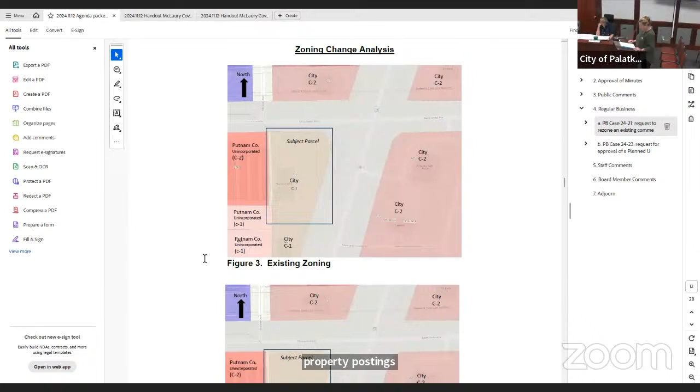The future land use is designated commercial. The parcel is proposed to be developed with a drive-up ATM kiosk for Bank of America. Per section 94-149(7), banks and financial institutions with drive-in facilities are permitted in the C2 zoning district, but not in C1. Public notice was issued by the city, including legal advertisements in the Palatka Daily News, property postings, and mailed notices to property owners within 100 feet of the subject property. The request meets all the standards for rezoning set forth in the code, and therefore staff recommends approval.

The applicant is present if there are any questions. Okay, thank you. Walton, you want to speak? Questions? Has anybody got any questions of Mr. Palacier, Ms. Garris? Okay, seeing none, move on through that.

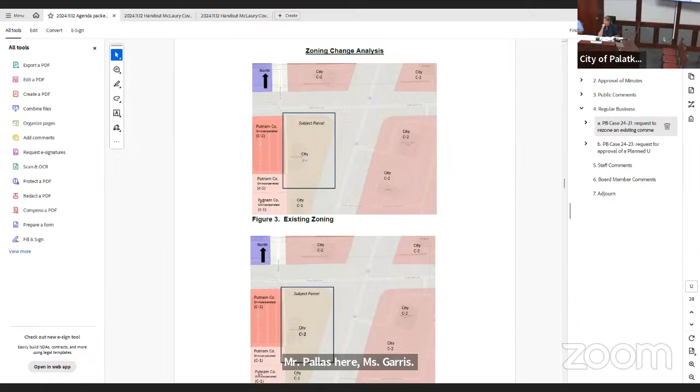Anybody in the public want to speak to this, for or against? Seeing none, we'll move through that. Bring it back to the board. Is there any questions or discussion the board wants to have, or do I hear a motion?

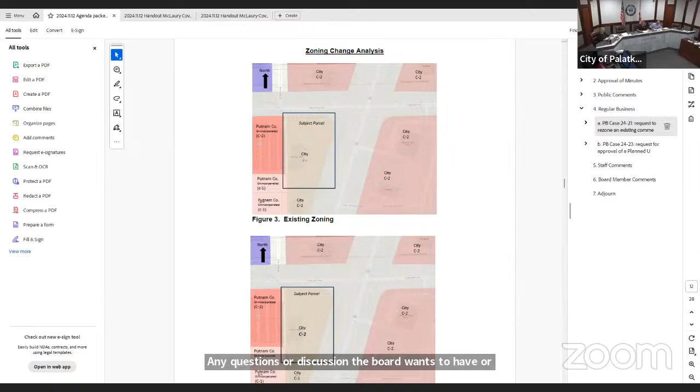I'll make a motion that we uphold the staff recommendation to rezone from City of Palatka General Commercial C1 to City of Palatka Intensive Commercial C2. Okay, we have a motion. Do we have a second? I'll second. Any discussion? Seeing none. All those in favor say aye. Aye. All those opposed? Seeing none, motion passes.

Granted. Now we'll move on to PB case 24-23. Request for approval of a planned unit development application at 00 McLaury Drive and 6200 St. John's Avenue. You gonna throw that one at us?

Yeah, okay, thank you. Before I start with the staff report, I need to get clarification here in the package that you have. Since the report was written, the applicant has submitted materials addressing some of the issues that I had pointed out in the report. We have a copy of the things that were submitted to us that the clerk has, and these later submissions by the applicant address some of the concerns and conditions that I had. So when it comes to the recommendation for approval, I will release some of the conditions in your staff report.

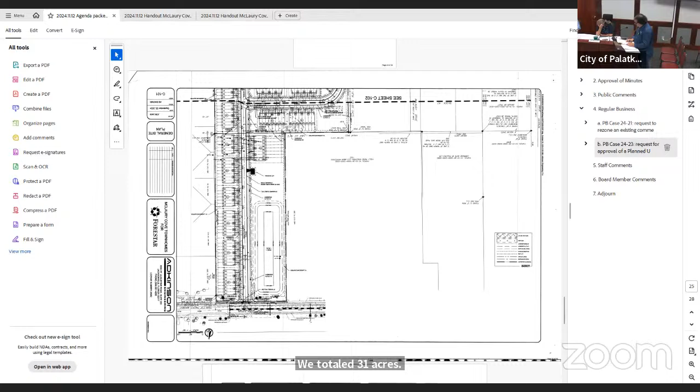As you pointed out, Mr. Chair, this is an application for a planned unit development. There are two combined parcels totaling 31 acres. One parcel fronts St. John's Avenue and is 6.67 acres, and the other parcel fronts McLaury Drive at 24.33 acres. If you remember, this item was in front of you for annexation, for a future land use amendment, and for rezoning about a couple months ago. Since then, it went to the city commission, which recently approved the request for annexation, future land use, and rezoning.

The parcel is now rezoned to Residential 3 with an overlay planned unit development. The applicant intends to develop these parcels as a planned unit development with up to 248 townhome dwelling units, which yields a maximum density of 8 units per acre.

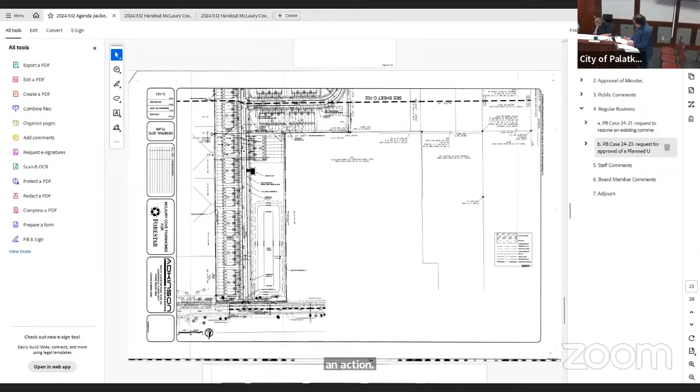We have reviewed the PUD again against the standard set forth in the code, that is Section 94-233. Based on our review of each of these standards, which is cited in the staff report, we are recommending that the request be approved, and that you recommend this to the city commission for consideration and action. In the staff recommendation, I had attached certain conditions of approval, but since then they have resolved those issues.

The first one is the site plan submitted. The first condition was that the site plan submitted should include provision for open space. The applicant has since submitted an open space plan that satisfies the requirement for the PUD standard.

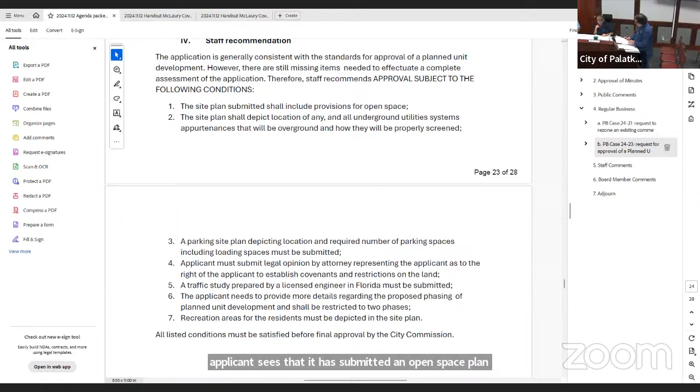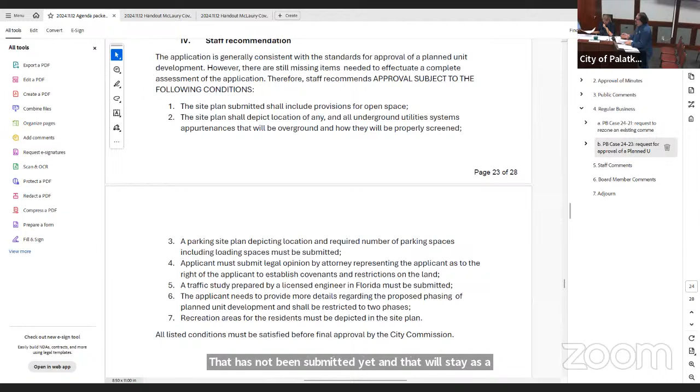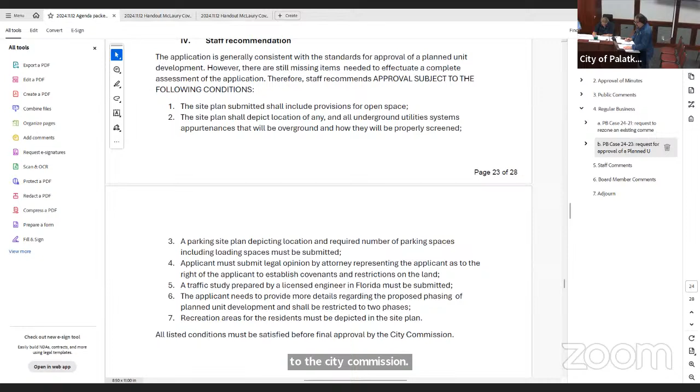The second item: the site plan requires depicting the location of any and all underground utility systems and appurtenances that are above ground, showing how they're going to be screened. That has not been submitted yet, and that will stay as a condition that has to be satisfied before it goes to the city commission. There's a requirement in the PUD standard that all utilities be underground, but there are some appurtenances above ground that are required to be screened, and the site plan submitted hasn't shown that yet, so that has to be satisfied before it goes to the city commission.

Condition number 3: the requirement for a parking site plan depicting the location, required number of parking spaces, and loading spaces. That has been satisfied. They have submitted a site plan indicating the number of parking spaces and their location. So that's been satisfied, along with condition 1.

Number 4: the condition was that the applicant must submit a legal opinion by the attorney representing the applicant as to the right of the applicant to establish covenants and restrictions on the land. That has not been submitted yet, so that condition will stay.

Condition number 5: a traffic study was submitted, prepared by a licensed engineer in Florida as required. So that condition has been satisfied.

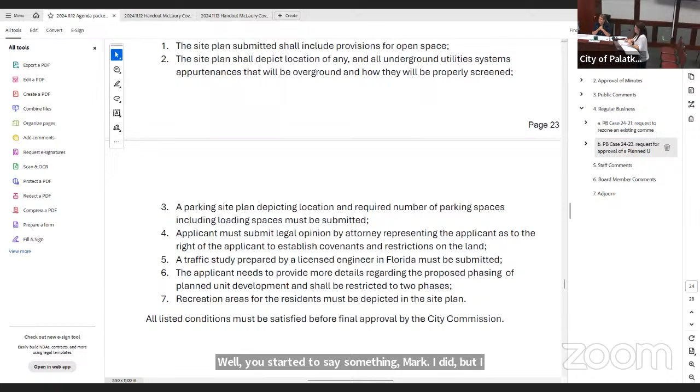Any further questions? Yes, sir, Mr. Kim. No, I'm good. Well, you started to say something. I did, but I changed my mind. Okay, well, I can do that. Yes, you can, very quickly. He's 80 now, he can do it. So, okay, well, no further questions of you, I don't think. Thank you very much. Thank you.

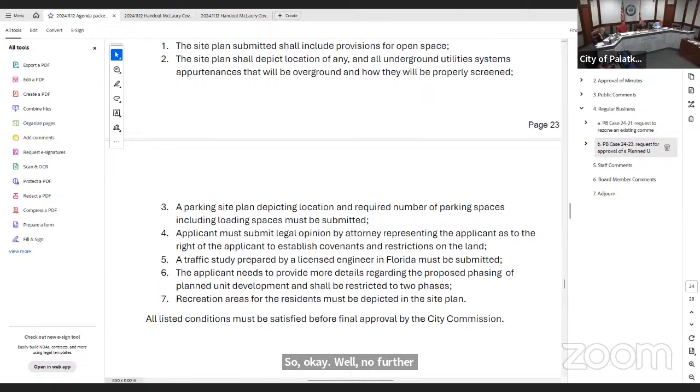Is there anybody in the public that would like to speak for or against this? Come and state your name and your address, please, sir. Gary Nielsen, 6104...

6110 Fourth Manor West. I believe the new development is going to back up somewhere close to my property. I talked to Lorenzo a few months ago about this, and we weren't really sure what was going on then. Then I got the letter in the mail about today.

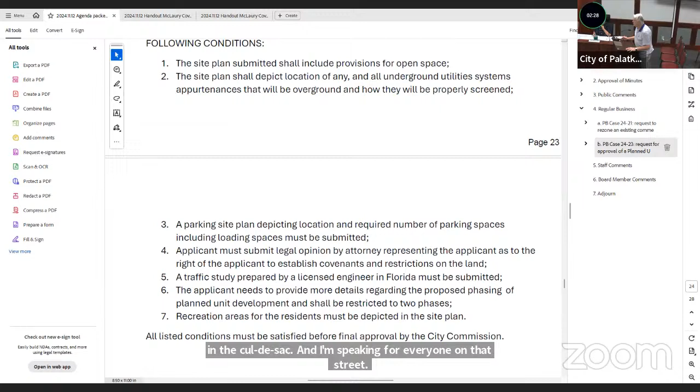I'm speaking for everyone in my cul-de-sac, on that street. A few of them couldn't come today, so I went ahead and came for them, to speak for them. A couple of questions have been answered already about what type of housing it's going to be. It's not low income housing, am I right? It's going to be houses, not apartments or townhomes.

Okay, townhomes, but it's not low income. You said 248? About where is this going to come in at? I can show you on a map about where I live.

Hang on just a minute, Gary, I'm gonna get to that question. You need to speak to us. Oh, I'm sorry, okay. I just want to know where it's coming in and how far it's going to be from our property. Ms. Krantz, is there any way you can pull that up on the TV, please? On the screen?

Mr. Chair, can I address part of what he's questioning? Yes, sir. The main access for this development is going to be from St. John's. Right, I know that. And I think they're going to use McLaury. At St. John's, how far down? It's in between Viking Manor and the cutoff to the hospital, somewhere in there. Isn't it gonna be between Carriage Gates and Holly Ridge? Yes. And then where is it coming in at?

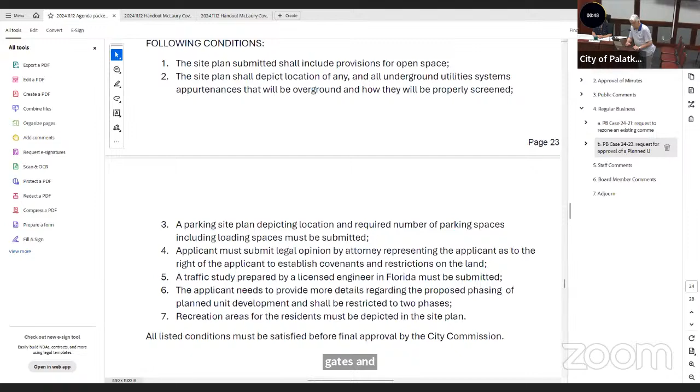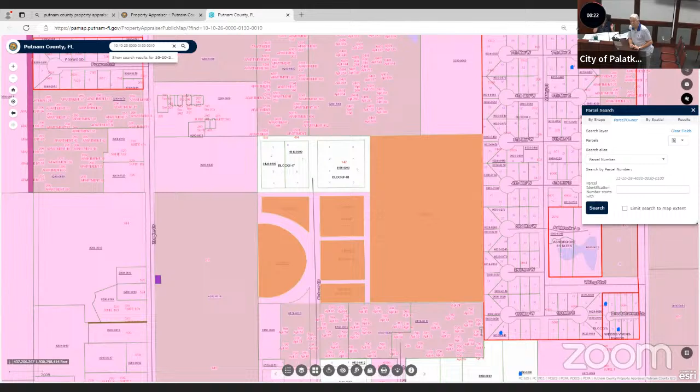Do you have the site plan? Oh, in the package, wherever it shows the site plan. May I stop his timer, Mr. Chair? It's fixing to go off. Yes, sorry, just so we don't hear that. The parcel map that you had up there will show us your answer to his question, yeah, the location.

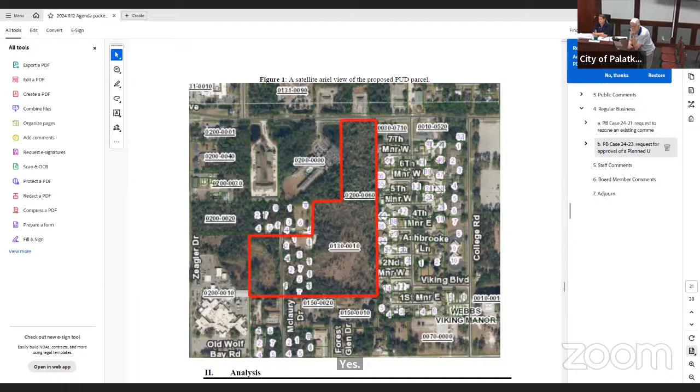Yeah, the pink part there, drag it down some. Can you show them? See that, St. John's Avenue. There you go, can you enlarge that a bit? Can you expand a little bit? That's good. So this is going, Mr. Nielsen, to answer your question, it's gonna come right up to the back of where you live at. Okay, I'm on Fourth Manor, right west.

Well, no, Second Manor West, Third Manor and Viking Boulevard. Yeah, it's gonna be right there. Okay, I know that's a big area there. There's a lot of golf balls out there too that I see. I'll let you know ahead of time. There is, yeah, always about 1,000.

But how far will, I guess the houses will be facing St. John's Avenue, right, and the back of them would be, no? No, okay, they're gonna be facing west. Oh, they'll be facing west, okay. So coming in this way, yeah. No, that way, I'm sorry. It's west. I can show you the site plan after the item.

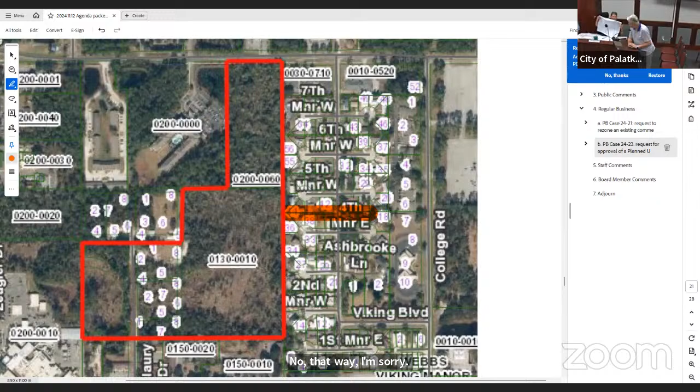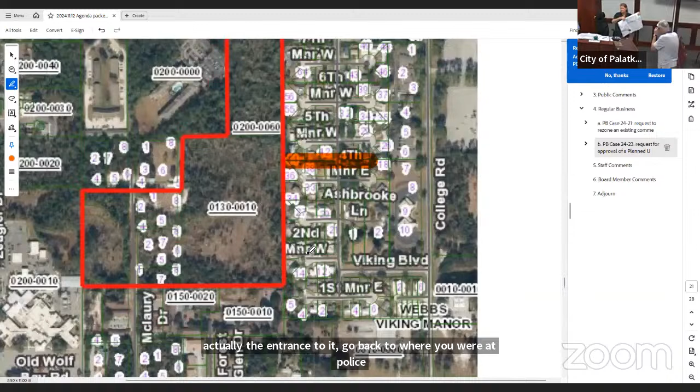Yeah, exactly. And actually, the entrance to it, go back to where you were at please. The entrance will be between Holly Ridge and the doctor's offices. I said between Carriage Gates and Holly Ridge. Am I right? If I can help a little, it's probably about 150 feet from the property boundary inward. So from the property boundary right here to the access is about 150 feet.

Okay, so you're saying that the townhomes will be 150 feet away from where he's worried about? No, sir, I'm talking about the ingress egress. Oh, okay, I'm sorry. What are the setbacks, say from his property line? Yeah, that's on the setback.

There's a lot of places going toward north, I guess it is, to Third and Second, Fourth Manor, there's no fence. Would I have a fence in the back of my house? That's what I was gonna ask. I'm sorry, it will be 40 feet from the property line to the unit, to the building, of the townhouse. Okay.

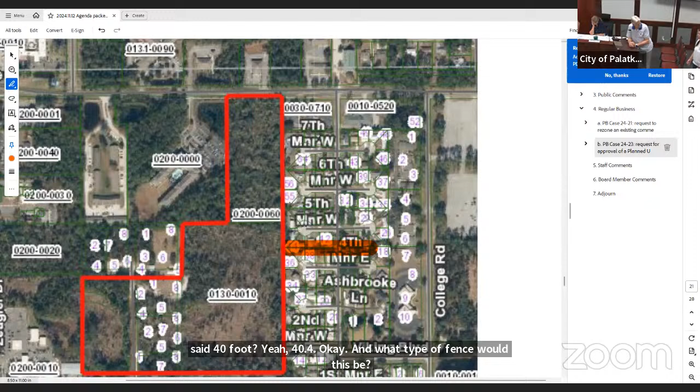That answer your question any at all, or are you still waiting or what? Yeah, well, the fence, are you guys going to put up any type of, okay, it's gonna be, you said 40 foot? Yeah, 40. Okay, and what type of fence would this be? Usually vinyl.

Okay, all right, we still have to review this, Mr. Chair. I know this is, we still have to review this when it goes for building permit. Right, and that's where we're gonna get really into the real details of setbacks and things like that, of that nature. Okay, so we'll know more in December, right? You're gonna have, your next meeting's gonna be in December? Or for the city commission, and then, yes, after that, and after that they have to go for the building permit.

Right, and exactly, that's where we're gonna get into the nitty gritty of the detail. And I'll receive something in the mail, like I have been. Okay, yeah, that's all I can ask. Okay, just, we'll kinda keep you posted. Appreciate it. Thank you, Mr. Newsom, thank you so much.

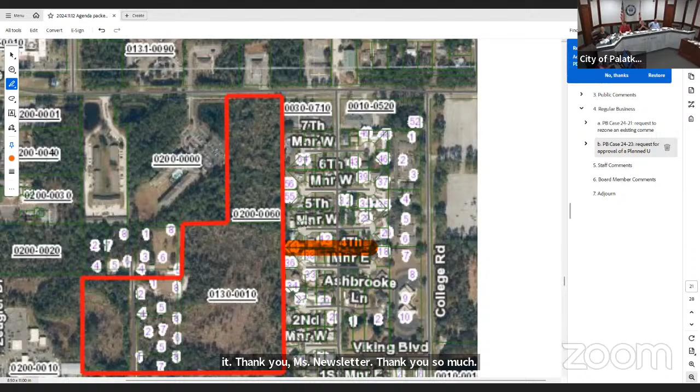Anybody else in the public? Yes, Ms. Allegra? Allegra Kitchens, 1027 South 12th Street, Palatka, Florida. I'm not either for or against the PUD, but I have a question.

I know from an emergency vehicle standpoint, you have to have more than one egress and ingress. You can't have the same way in and way out, just one way in and one way out. You have to have two different ways in and out for emergency vehicles. And I wonder if that's been taken into consideration. I know they talk about McLaury, which they said is a dirt road at a certain point. Is that adequate for emergency vehicles as a second way in and out? That's my only question, thank you.

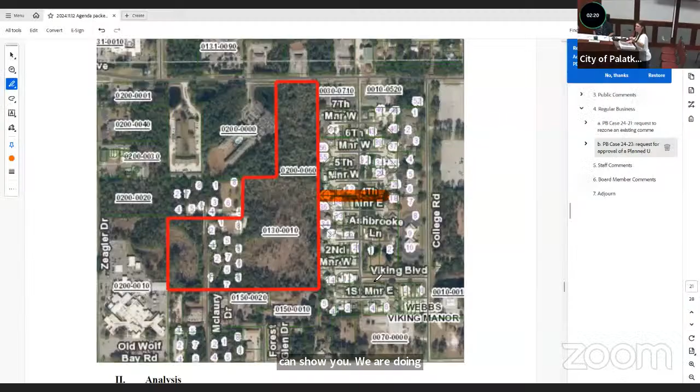Want to answer that please, ma'am? Yes, sir, I can. So if Sunny could bring the site plan back up, I can show you. We are improving that southern portion of McLaury Drive on the actual site plan. Can you pull up the one that I had sent? Sure, that might be easier. You want this one or you want the one?

I'm sorry, you're saying this one, but she's saying to go to my email, the one she sent me. Would you like the ones you sent? Yes. Okay, but in short, we're improving the southern portion of McLaury Road, or McLaury Drive, to be able to handle any access that might be necessary. I understood that with what you were saying. Yes.

We're not improving beyond that point because of the wetland that's there, and we want to conserve the wetland. The dirt road will maintain from beyond that point. So we're actually coming from St. John's Avenue in the north and coming around this way back down to McLaury, south on the left-hand side. Is that correct? Yes sir, that's what I'm saying. Okay, thank you.

Any other questions or comments? Seeing none, I'll pull this back to the board. What is the board's pleasure?

Mr. Burnett? Mr. Wallace? Mr. Moore? Pre-read, and I don't have any questions. Okay, so can we have a motion?

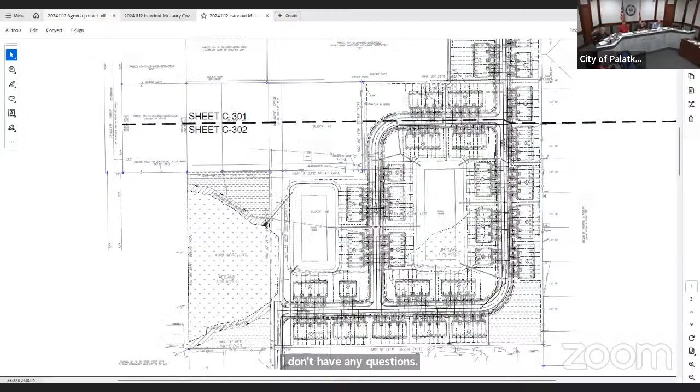Wait, I don't feel right moving. As part of this motion, I would like to be put in, for your negotiation, that we get more trees.

Make the motion, Mr. Wallace. Well, no, I'm not going to. Because the trees is this department, I understand, not mine.

What do you want for more trees? I don't object to the whole project, but I just want more trees, because we got a whole bunch of townhomes and it'll be a lot nicer with trees.

I think, Mr. Wallace, you're seeking a motion for approval of the PUD overlay with the condition that it include additional trees on the landscape plan. As part of it, but I'm not gonna make the motion, I'd like that to be part of it.

Is that a motion? No. Mr. Chair, just a friendly reminder, when you make a motion, include the two conditions for the approval, that's all. I understand, I'm just waiting on the motion. I can't make the motion from here. I know.

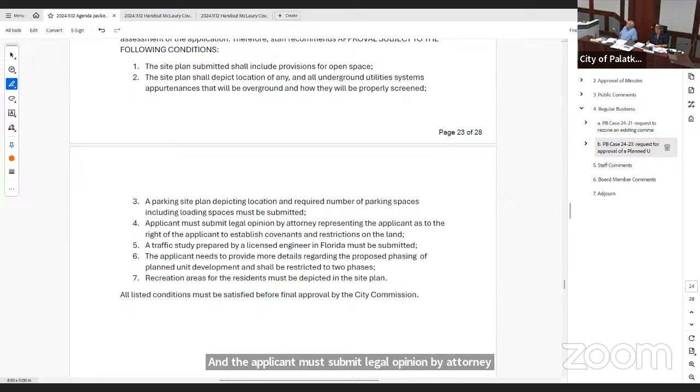Come on guys, I'll do my best. I'll make a motion for the approval of the plan unit development with the staff recommended exemptions: the site plan having to depict location of any and all underground utility system appurtenances that will be overground and how they will be properly screened. And the applicant must submit legal opinion by attorney representing the applicant as to the right of the applicant to establish covenants and restrictions on the land. And for the staff to meet with the developer to look at additional trees being on the site plan they submit in the future.

I'll second. Have a motion and a second. All those in favor, any further discussion? One question, yes sir. He said with the exemption of the two cited things, do we need to correct that word?

Conditions. Okay, the conditions. Thank you. You want to correct your motion? I'm sorry.

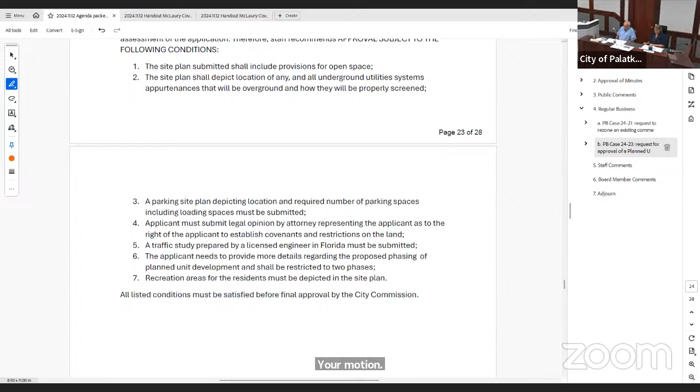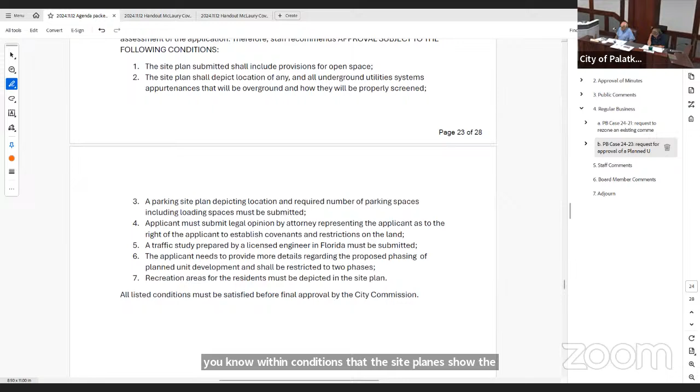Okay, I'll make the motion to request approval of the planned unit development with the conditions that the site plan shall depict location of any and all underground utility systems, appurtenances that will be overground and how they will be properly screened. Applicant must also submit legal opinion by attorney representing the applicant as to the right of the applicant to establish covenants and restrictions on the land, and for the staff to work with the developer to look at having additional trees on the property.

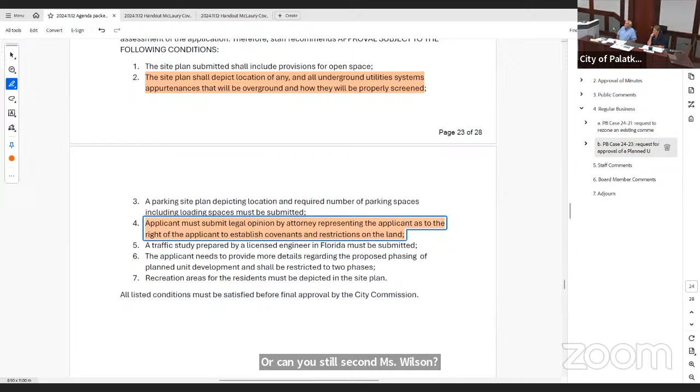Do you still second, Ms. Wilson? Yes, I second. Have a motion and a second. All those in favor, say aye. Aye. All opposed? Seeing none, motion passes.

Is there no further business to be taken before the board? Nope. Okay.